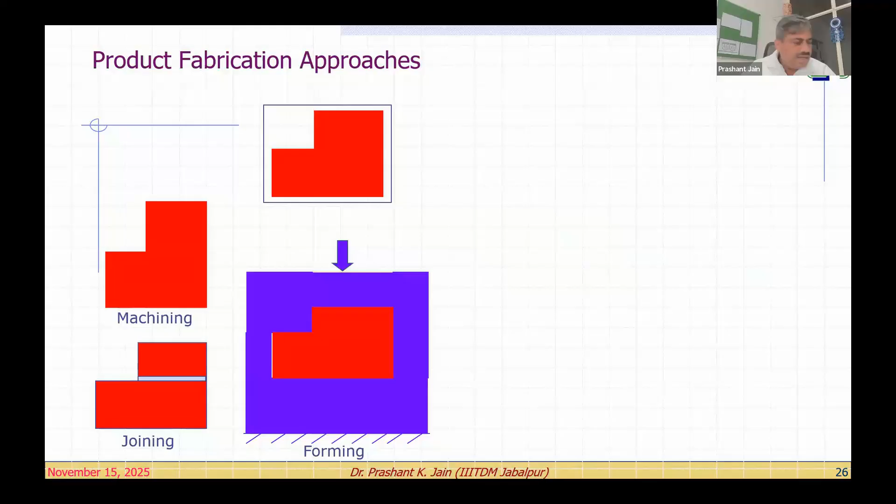Then we have the joining processes, right? So you know welding, soldering, etc. And the most common process is the forming process, maybe injection molding, die casting, or forgings. This is the most common. Now today we are talking about additive manufacturing, or rapid prototyping, or layered manufacturing, right? So you see, this time we have the bottom up approach. In this bottom up approach, we are depositing the material layer by layer and creating the layers towards the top. So like this.

Now you can see over here what advantage we can gain from this. So in additive manufacturing, what do you get? The process creates a model of an object directly from its CAD model by depositing the material in layers. So see, this is one panel of the hair dryer gun. Otherwise, if you don't go for rapid prototyping or 3D printing, a lot of things are required. For visualization, you may require many drawing sheets to convey your idea to the manufacturing shop. Then you have to create patterns, molds, etc., perform the casting, and then some finishing operations are required as well.

So in this case for polymer, you see here, the entire product can be made right in your hand. Okay, so this is the advantage you are going to get.

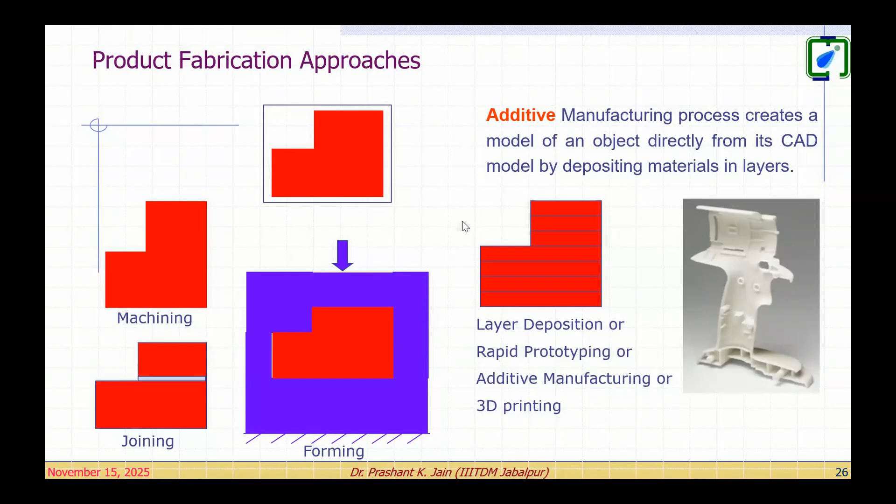So why do we go for additive manufacturing? Immediately when I say additive manufacturing, two things come to mind: additive, then why not subtractive? Or what is subtractive? So we have both ways available. Machining is a subtractive process. Begin with a solid piece of stock. The machinist carefully removes the undesired material, so you get the desired geometry. So subtractive means subtracting something.

Now, what happens in this case of subtractive machining? For some complex part geometry, it is very difficult to go for machining processes. It may be very exhaustive, very time consuming, and very, very expensive. Suppose you are working on brass, where mistakes are very costly. If your part is rejected or mismatched with the desired dimension, then you have to reject that piece, and the material cost is very high.

Sometimes the workpiece size is huge and the precise part to be fabricated might be very, very small. In that case, the machining process becomes very, very expensive. Even some of the parts you can see in the picture are very, very complex. You may not even be able to produce them using machining processes. In this case, look at this.

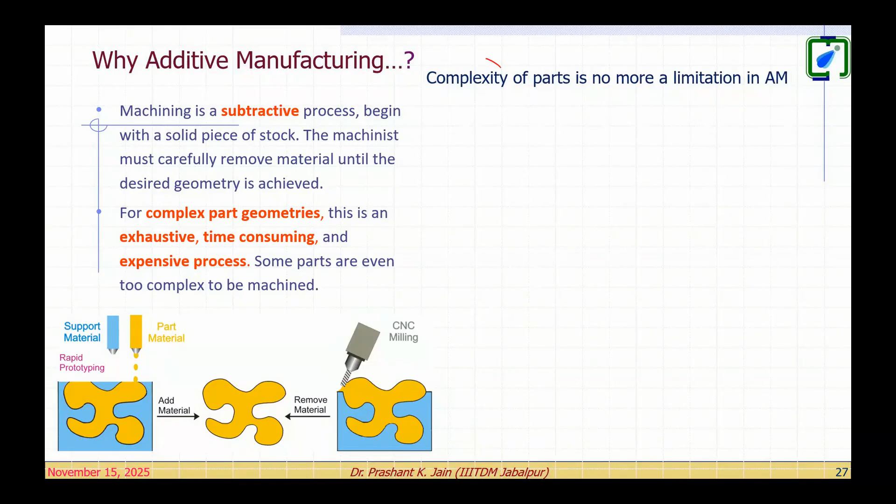So here you can see why we go for additive manufacturing: to avoid complex part geometries being very exhaustive, time consuming, or expensive. So what happens with additive manufacturing? The complexity of the part is no more a limitation.

What we often say, a picture is worth 1,000 words. It's a communication tool. You don't want to communicate something just by writing paragraphs. You want to draw something. Why? Because we want effective communication. Instead of text, you use the picture as a tool. With rapid prototyping of polymer material, you get the opportunity to print a model. So when we say a picture is worth 1,000 words, a model is worth 1,000 pictures. That's the advantage you get with additive manufacturing.

Now I'm going to very quickly tell you about the processes, fused deposition modeling. Why am I talking about fused deposition modeling? Because it has given the idea of how we can go for metal additive manufacturing, and why to go for metal additive manufacturing, which we have tried. In the subsequent part of this session, I will show you some more videos of our aluminum printing process.

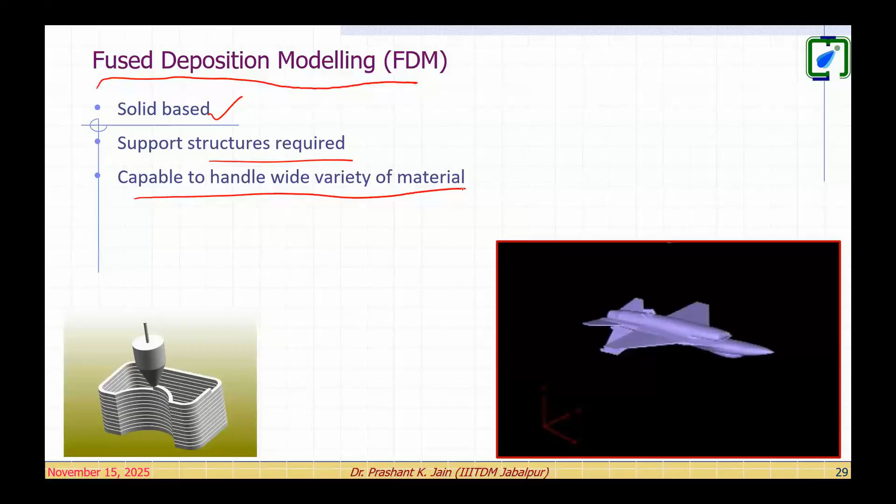This is commercially available, easily available. Polymer printing: the process is solid based, support structure is required in this case, and it is capable of handling a wide variety of materials. Look at this. This is the nozzle part and it forms like this, every successive layer. And how is the process working? Two wire spools are there, two heated nozzles are there. The red color is the heater, and here are the rollers. You can see over here, these two rollers.

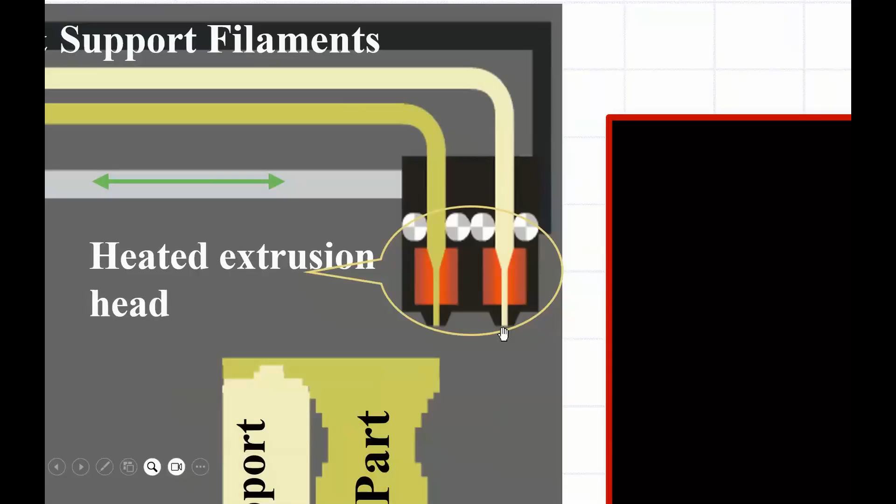Okay, so from here, this wire spool material is coming and pushed by these rollers through the nozzle, and here this is deposited, right? So this is the part material, this is the support material. Okay, and with this support material, this nozzle. So here is the build platform. Every time when this first layer is deposited, this platform will go down.

Okay. So here the part material, this part nozzle will work, and everywhere, just like a Mehendi cone, it will deposit the material. And for this overhanging feature, you require a support. This support material will be deposited in this way. Okay. So once this first layer is completed, this platform will go down by one layer. Say in this case, it is 150 micron. So by 150 micron, it will go down.

Okay. And you see, based on this kind of model, you see the architectural model. See the house model. This is through the ABS material and printed through the FDM process. Now, see the large model, your turbine model, the blades, etc., the full component you can see over here. This is built by the FDM machine.

Okay. So at this stage, I would like to know how many of you are aware about the FDM process. Accordingly, I will talk further. In the meantime, please type in the chat box. In the meantime, let me run this video.

You can see my screen, right? Can you listen to the sound? No, we cannot listen to that. Okay. I think the sound setting somewhere might be off. Aman, can you tell me? Yes, sir, I'm looking after it. Okay. Otherwise, I will explain. Nothing to worry. It's checking. No, it's video only. Okay, let us continue. System sound we wanted to transfer actually. We'll look for the system sound. Sir, it is from your end only. From my end, yeah, that is what I'm looking. If you have connected any earphone, maybe unplug it. No, not connected. I'm not using earphone. I'm directly using laptop. Okay, leave it. I will explain. Let us continue with this.

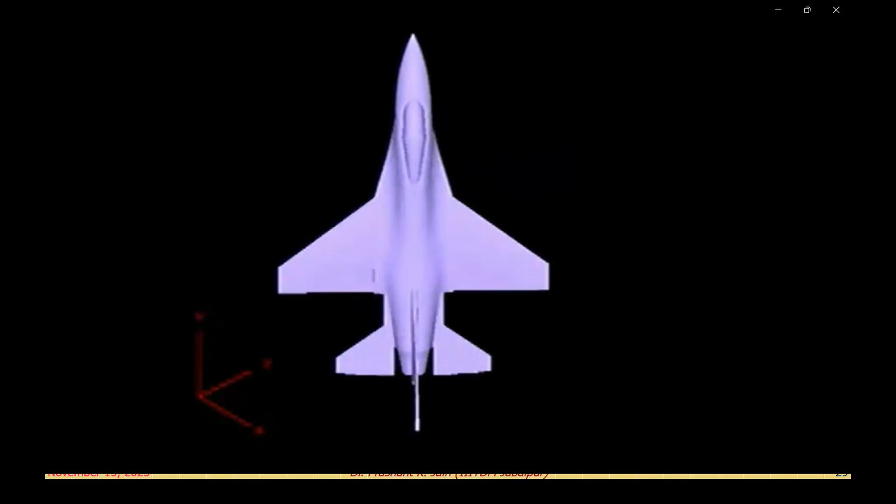So see what I'm trying to show here. You can see here, this is the solid model. And first we export it as an STL file. And with that STL file, that aeroplane model has been oriented and now it is sliced into planar sections. So every section is a planar section; contour information we have. Then this is the support information. Now see the top view of every contour.

You can see here how the nozzle is printing; in actual practice it is not that fast, right? But you see here, whatever geometric model you have created, that geometric model is now available and we can build it, we can print it, we can have it in our hand. Okay, that's the important thing. Now I'm coming back to my question.

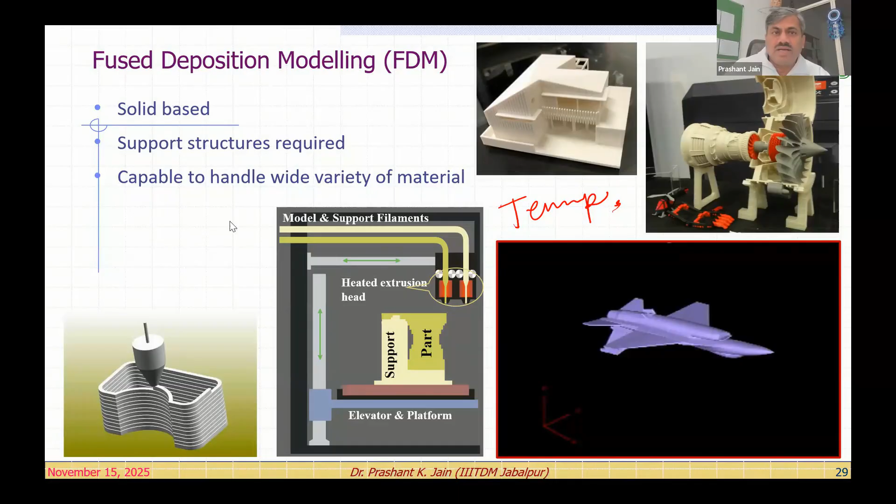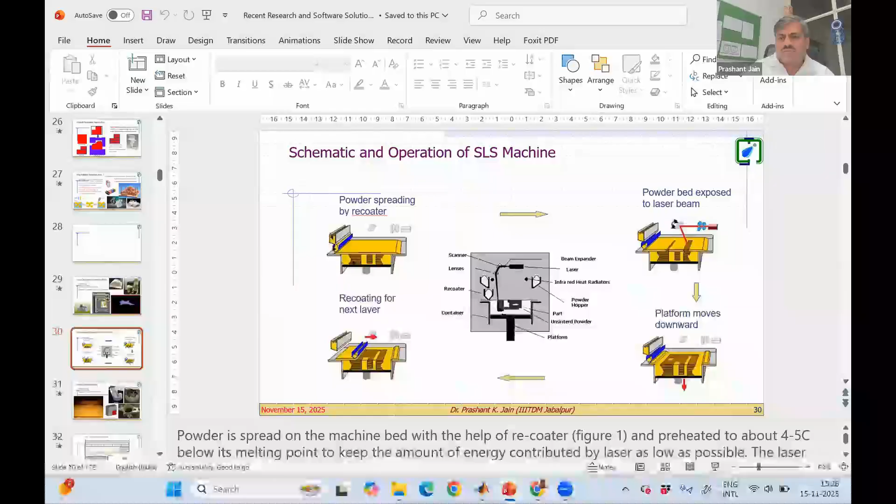Okay. Then what happens after the one area? You can see over here, this is the solid portion. Once this is solidified, this entire platform will go down. So you can see here, this is the solid material, and on either side you can see the unsolidified material, that is the powder. So in this case, you don't require any support material because the unsintered powder will also provide the support.

Okay, so once it is solidified, then it will be recoated again. So every time what happens? Recoating done, then the laser comes, scans the path, preheats the material, post-processes the material, and after this the platform will go down every time, and once it goes down, the recoater again comes left to right and right to left and lays the new fresh layer.

Can you think why I am talking about 150 micron layer thickness? And what would be the particle size in this case? Anyone? What would be the particle size in this case? 150 microns. Pardon? 150 microns. 150 micron. Okay. Anybody else?

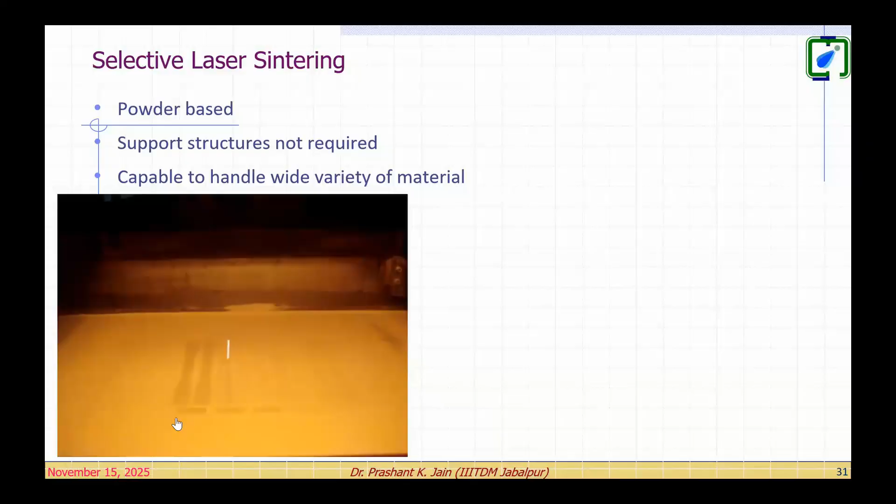Look at this video. We are printing some tensile specimens. You can see these tensile specimens with a different, darker color. That means in this area the material is solidified, the material is joined together, right? And this is the powder bed platform. The laser light has become reflective because, for experimental purposes, we have mixed nano clay with this polyamide 2200. This is the nylon material; the commercial name is polyamide 2200. So 40 to 60 micron size of the polyamide material.

Okay, let me continue this video. See here. This is the recoater. This recoater has spread the new layer. The first layer after solidification goes down and the new layer has been built up. And this light sparking, the immediate light you have seen, is the infrared heater. That infrared heater will keep the new layer heated just 4-5 degrees centigrade below the temperature.

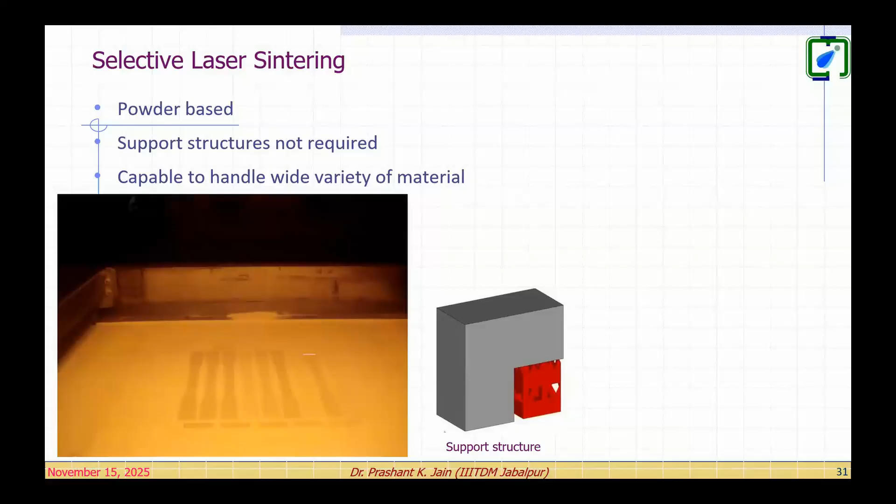Otherwise, if you don't have additive manufacturing, how are you going to make this part? How many small parts do you have to take for the build, or for casting, or how after sintering are you going to remove this part? Every time you require investment casting because you may not be able to reuse it. Similarly, see how many parting lines there are, how many different surfaces and angles. Because of these multi-directional features, you cannot do CNC machining. And since you can't do CNC machining for this part, you can go for 3D printing. And in 3D printing as well, you have to properly design and understand.

Okay, so that's how the metal is deposited. Here we take 40 to 60 micron powder. In the case of metal, we have to take 20 micron size particles. Now this belongs to steel, 316L steel. So that steel has to be in powder form first. That is the big cost and challenge, right?

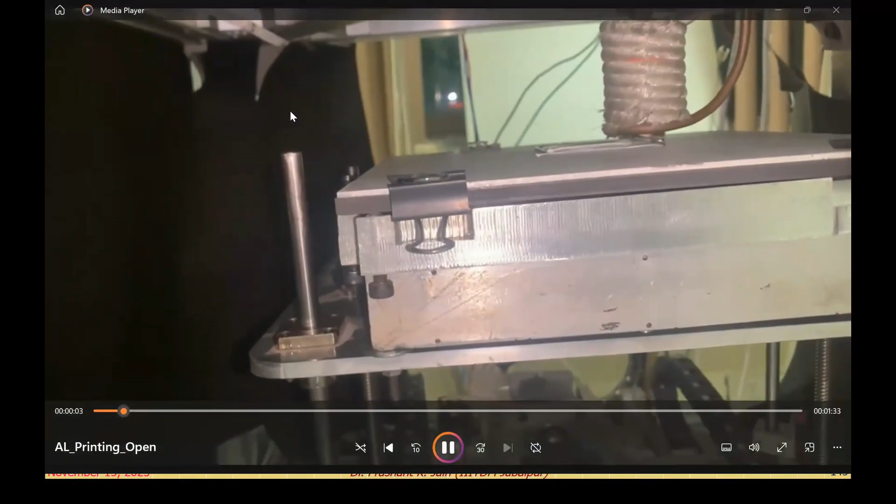See, this is our build experimental setup. With the polymer machine you have seen how it is depositing the material. Now see what is happening with the metal. This is our experimental setup which we have developed in the lab. See here, the extruder head is there, the nozzle is there. Instead of a resistance heater, we have an induction heater; these are the copper coils. Inside this, the nozzle is moving and depositing the aluminum just like the plastic. The plastic was printed around 220 degrees centigrade; this aluminum is printing around 600 degrees centigrade. And it is a highly reactive material.

Okay, so immediately, as soon as it comes out, it reacts with oxygen. So oxidation occurs and that will not allow you to join the material. That's why it has become more challenging.

You can see here on the bottom side, this is the ball screw, right? Chain conveyor system. This ball screw is rotating this table. So the positioning is done in XY, and for the Z direction, the table comes down one step every time.

Okay, I hope this will create a clear picture in your mind of what we are going to achieve. So let me start from the beginning. This is the scene with metal additive manufacturing. Okay, so now I'm coming back to the principle of additive manufacturing after talking about two processes.

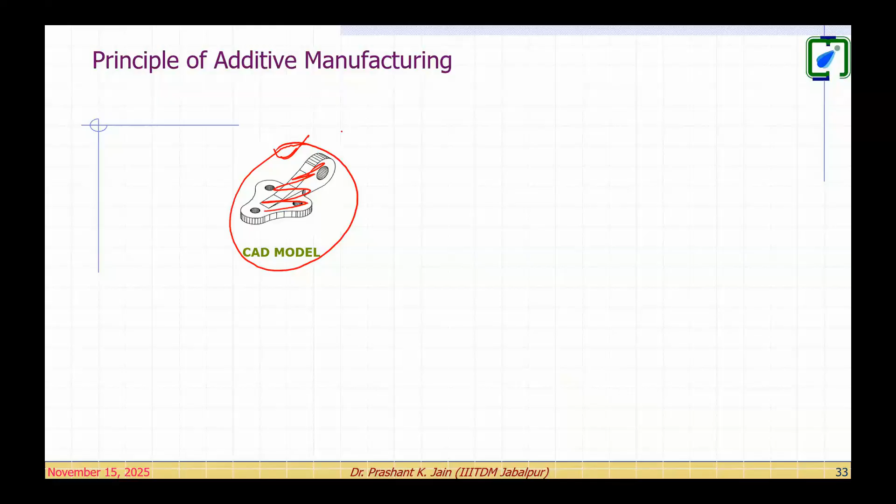Okay, this is the CAD model you are going to make. After designing, you want to make a print from any machine, maybe a metal machine or a polymer machine, maybe extrusion based or powder based, whatever. This information is stored in the computer in the form of a picture or a geometric model. With this geometric model, you need to find out this information because every time you are going to build a layer.

Yes or no? Yes, sir.

So once we get this information in the layer, then we will square it to make it the prismatic size of each and every layer, because a layer cannot be built in this way. This is something like building your house. Suppose you take these two layers, your layer should be like this. So everything is now made in the form of stairs, so that every time you can deposit the material in this area. The moment you deposit material, this area will be filled. Similarly here, your nozzle will come and deposit this area.

Okay, so we say CAD model, slicing the CAD model, squaring the edges of the model. Once the squaring of edges has been done, then you will deposit the material or cut the material in this shape. Then you start joining them, so stacking and pasting of the layers. Once we join them, what are we going to receive? We will receive this product.

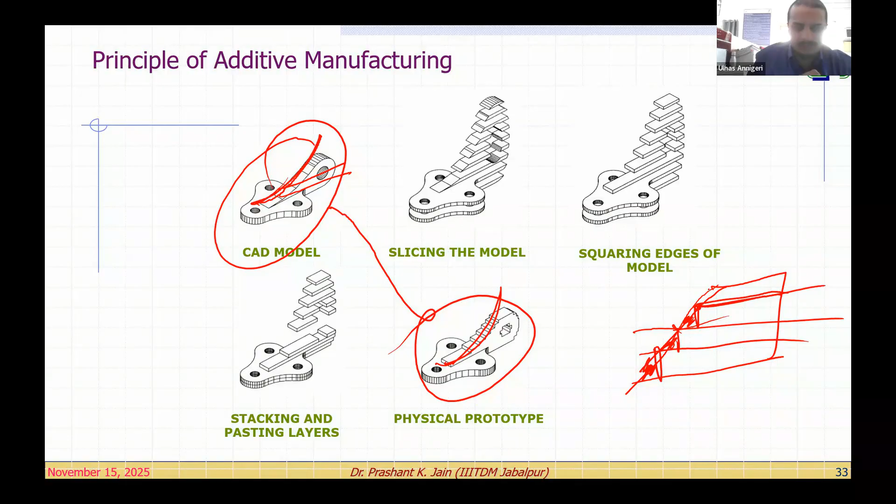At least five yes responses. Let me go back to the chat box. Yes, Manish, Ulhas, Anand. 3 responses, 4 responses, Vivek Gangrade. Yes.

One more response. This is what we call the stair-stepping effect. What is going to happen? Everything will have the stair-stepping effect. Okay.

Now look at that. Let me come to the process chain. What is required for this information? You want a cross section to get this contour information. Only once you get this contour information can you do the square edging. And once you know this contour, you can formulate the nozzle path. So our requirement is first to find out the contour information. This is the model, and you are cross sectioning it one by one. Got it?

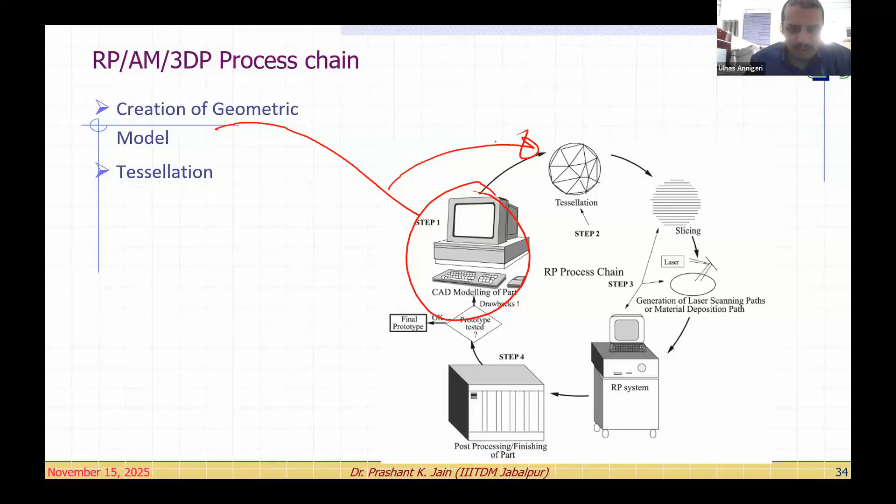So coming to the process chain: your computer model, you are creating a geometry, tessellating it. Does anybody know about tessellation? What is tessellation? STL format. Triangulation, sir. Okay, STL format. After tessellation, the file is saved as an STL file. But what is tessellation, or what do we do when we save any component in an STL file? Triangulation. More triangulation, more file size. Less triangulation, coarser and the minimum file size. Okay. Anyone else?

Anyone else? Tessellation is a piecewise approximation of the surface. You had this ball surface, and you approximated it piecewise with triangles.

This can be a triangle, a rectangle, pentagon, hexagon, anything. But we opt for the triangle because it is the plane which can be created with the minimum number of sides; 3 sides are the minimum required to create a plane. Another thing, with a 3-sided plane, a smaller-sided plane, you can maximize the area covered under this tessellation. For example, suppose it is a sphere like this, and you divide it into only 4 triangles. This much material will be removed.

Got it? But instead, if you have 8 lines, we can have this kind of shape. Instead of this 1 line, you can convert it to 2 lines, and only this much volume will be removed. So you have saved more volume, so you will be closer to the desired design of the designer. That's why we opt for the triangle. Is that clear? And that's why we call it triangulation.

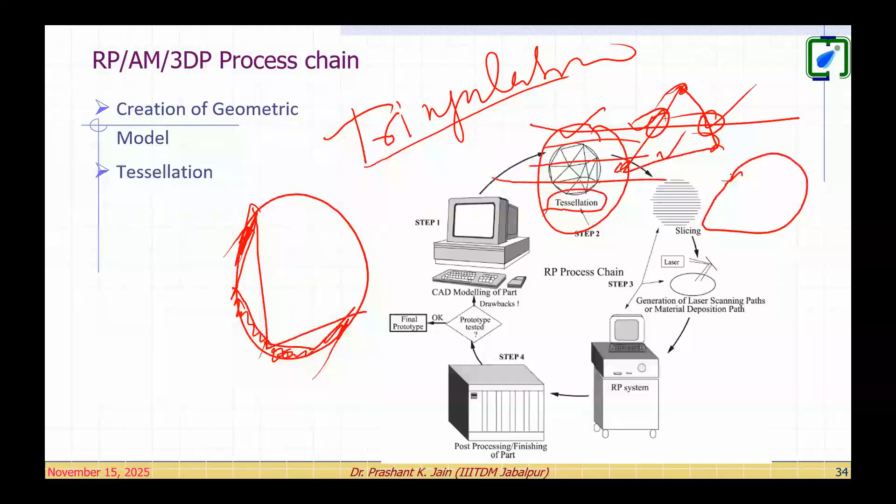And further, this plane can be taken into 3 lines. So suppose this is the plane passing through this triangle. You can find out this intersection point, this intersection point. And similarly, you can take all multiple triangles and find out whatever the number of points coming, maybe sometime 1, 2, or maybe sometime 3, hypothetically. So that will help you to make this contour information. Okay.

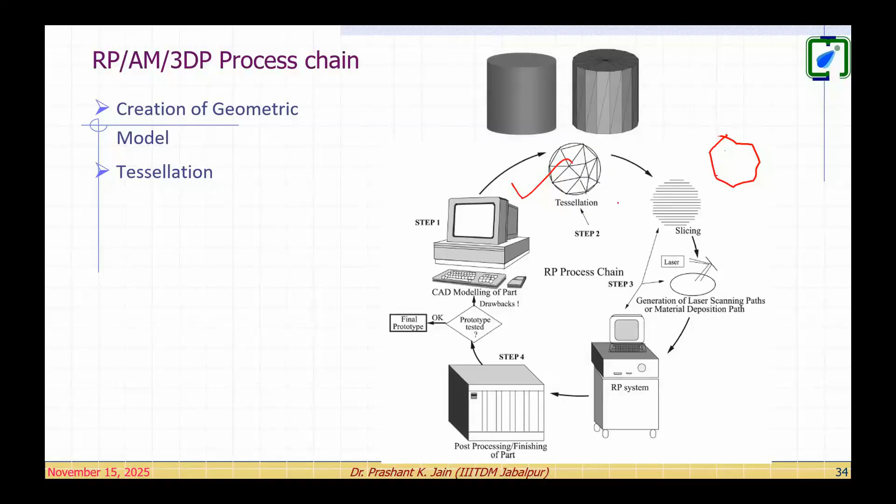Now this is what somebody was telling here. If you have the more number of triangles, this contour will be more and more smooth, more and more close to the desired geometry. Okay, so that is one, the tessellation you have done. Third, you have done the slicing. After that slicing, you got this contour, right?

Now you are going to generate either a nozzle path, and if it is a laser, then the galvano scanner will generate the path, right? So slicing done, then generating the laser path, scanning path. I will show you in the MATLAB how to do it. Then the post-processing. Post-processing will remove the support structure, any other unwanted material, or suppose some support structure is there.

So see how we are going to implement it. The first model you can see, this is the Pro-E model. This is the tessellated model. Can you see here the different triangles are there? What we have talked, on the top surface only 2 triangles are sufficient. But here you can see sculptured surfaces, curved surfaces. So more number of triangles are there to keep very close to the desired surface. And on this side, you can see here.

Okay, look at this. After this, what will we do? See, what is this diagram showing? Blue color lines are there. We have connected all the intersection points to each other. Okay, but this information is not at all useful for us. Right. So what do we have to do? We have to join these points in some logical sequence, right?

So you can see here in these points, this blue color contour is showing the external contour. This red color contour is showing the internal contour, like this. See here, we cross-section at this point. Once we cross-section, you can see this area. Inside, hollow material is there, and this is the solid part. Similarly, here is the solid part. So that is how we find out the internal and external contour.

Then the one task remaining is getting the tool path generated. For tool path generation, we can apply some logic. Suppose my laser is moving like this. At the first intersection, I can say the laser is switched on. So the laser will be switched on and this area will be solidified. At the second intersection, we can say the laser has to be switched off. So the laser is off up to this point. So no solidification takes place, and you don't require solidification in this area.

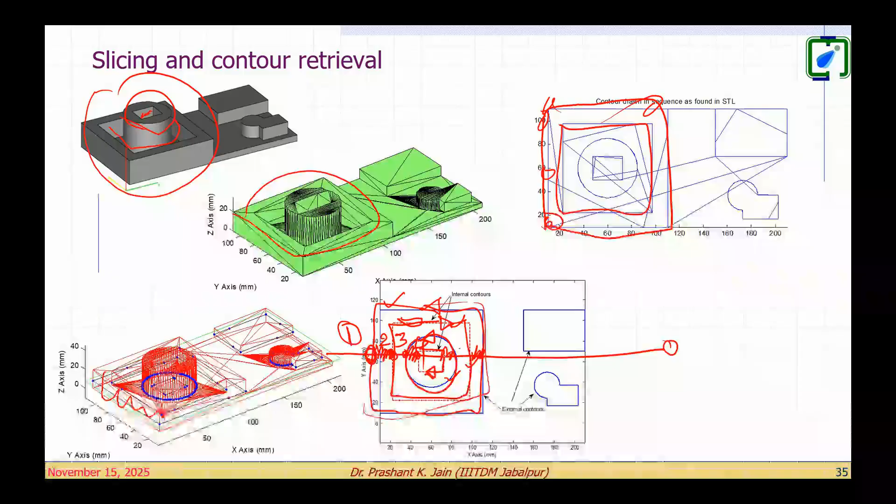I hope in further sections, Dr. Sachin will take you more on sensors and actuators and CNC machines, IoT kind of thing. So you can see the programming you have to do, and that programming you have to connect with the hardware. Okay. So this one. Now see how this is generated and taken into this.

See the next slide. You see over here the same way. Here your switch on, switch off. So this area you have already marked, which is going to be solidified, right? Solidification. Remaining area laser will fall down. No solidification means it will be switched off. Is that clear now? The last figure is clear now? Yes, sir.

Okay. So see here, otherwise we have the commercial softwares. We can do all this slicing. Let me show you. How many of you are aware about the Magics software? Quickly, you can type in the chat box or say yes, no. Anyone? So that I will go to Magics, or we can skip also.

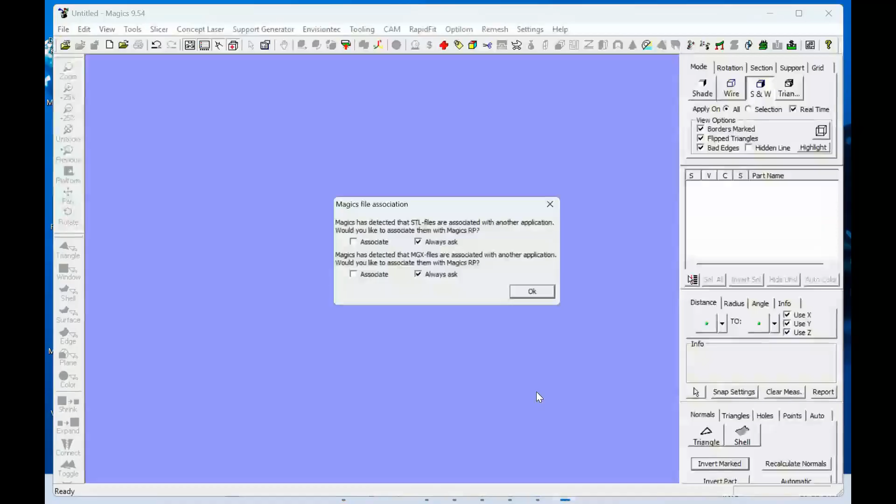Okay. I'm not going into the detail of the software, but I will let you know what we have done through MATLAB. So I will run MATLAB as well as SolidWorks, both. Sorry, and Magics as well. Because we are running short of time, I will let you know how we have done this. And if time permits, in some other session we will discuss more detail on the ball screws, actuators, sensors, so that how we control our CNC machine.

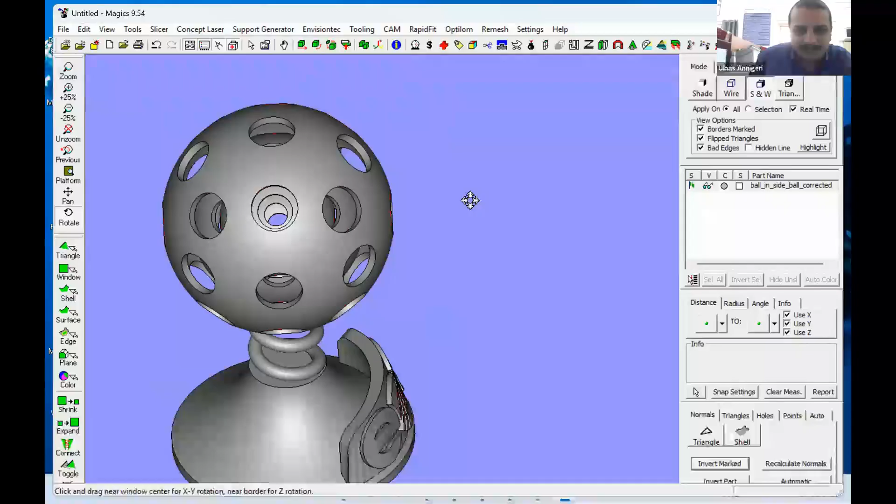Let me load a part over here. You can see over here, right? I'm using this part. You can see here, there are 3 spheres inside each one. Is it visible, right? Yes, sir, it is visible. Okay, right now I will tell you, suppose this is what we do. This is the shaded mode you are seeing. This is the wireframe, and this is the solid model.

Now you see the triangles. What is there? This is the STL file, and everything is kept in triangles. You can see on my screen that all the surfaces are designed as triangles, everywhere there is surface. And why do we do this triangulation? Because we wanted to facilitate the slicing process. So that's why we do the tessellation or triangulation.

Okay, now let me show you the section. Can you see now the part is sectioned, cross section? Can you see the red color is the inside picture showing, and the blue color contour is visible. You can see over here the visible contour. Okay, keep on typing yes, no, so that I can quickly get the response, and that will motivate me to move further.

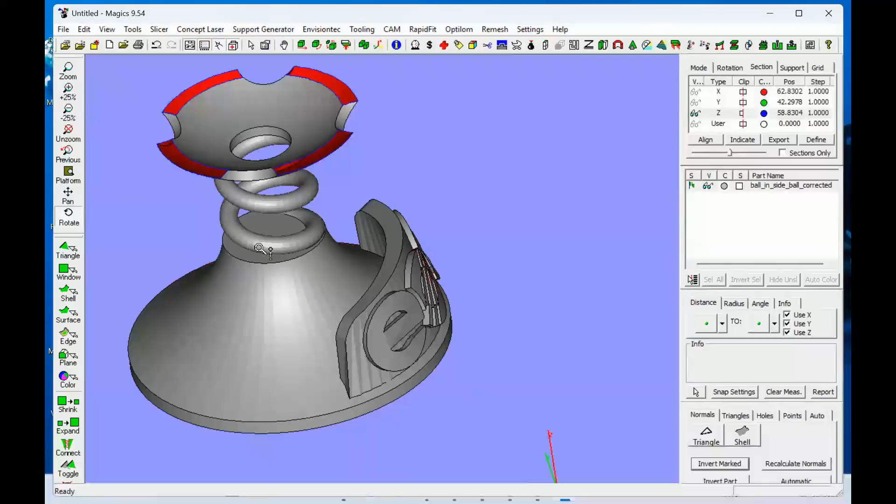Yeah, very nice. So you see here, the moment I start moving in the vertical direction, see what is going to happen in the first slice. See, you see the circle moving on the top side. You can see here, as somebody said, that is the contour at a specific slice. You see here the contour at a specific slice. At this stage, you see only the sphere is going to build in this way. Right?

See here, the first sphere is built, second sphere, third sphere, right? And from all the triangles, they are connected and converted into a logical sequence. So we have the closed contour. The requirement is that the contour is a closed contour. Open contour we cannot accept. Okay. And you see here, the 3 spheres are built without touching each other, without joining each other.

So now you know about the SLS process. So what is actually happening? In the SLS process, in between the first contour and the second contour, unsintered powder will provide the support. You can see on the screen, third contour, second contour, you see it is in the air. It is not connecting with anywhere. Okay, but it will still be built without any joint, and it will continue to build like this.

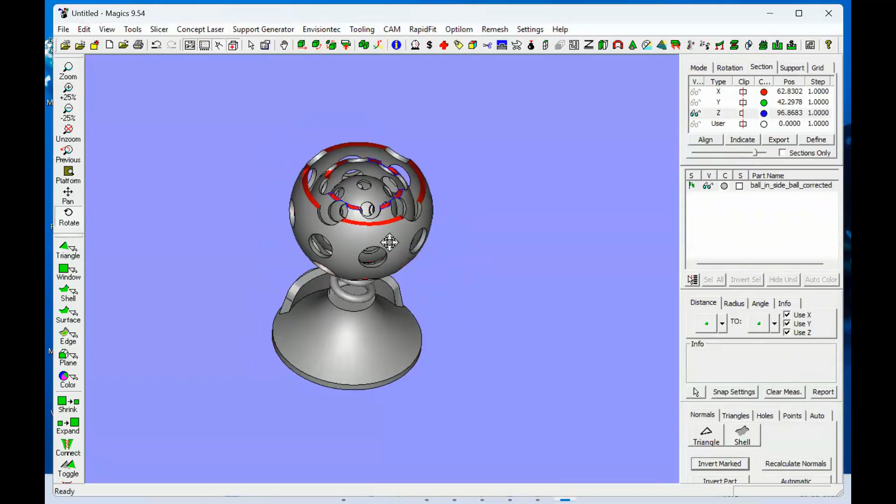See, the first sphere is completed, right? You can see over here. I'm trying to slowly move. I hope you can see the movement of the sphere. Okay, then we continue. So what will happen? Second sphere built now, third, second, and finally like this, and your part will be built, right? And this is the section. This is what we have done in the Magics. Okay.

So at this stage, if you have any other query, then we will switch back to the presentation mode. There is no support material in case of SLS. The powder that is supporting actually, could it be used or is it waste? Very nice. This can be reused, but we need to mix with some fresh powder as well. Whatever material you have used, you can reuse it, but with some percentage of the fresh material. That technically we call the refresh rate.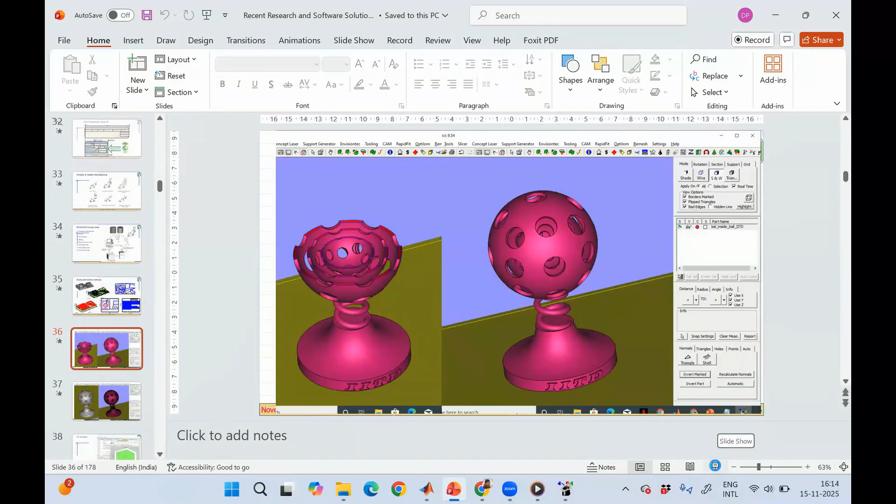So some 60-40 or 70-30 ratio, we have to take so that we can reuse. Because otherwise, its neck formation capability goes down. So two particles are there, but they will not form the neck. They will not join. So to make the joining capability of the powder remain intact, we have to put some fresh powder also, right? That's the requirement. Remaining things can work.

Okay, now look at this. This is the STL file. I will show you this in MATLAB. This is the background. You can see here the program written in MATLAB so that this STL file can be read. And this is how, if you open an STL file...

Because of the shortage of time, I think we have to wind up by 4:30, 4:40. Your next session is at 5 p.m., right? So you can have a 10-15 minute break.

So I'm not opening the text file, but you can see on my screen, right, how the STL file looks if you open it in the notepad. See here? Let me see. If I hyperlinked it, I will open. Yeah. This is the cube file. Okay, I'm opening it in the notepad. You can see here, this is the solid cube.

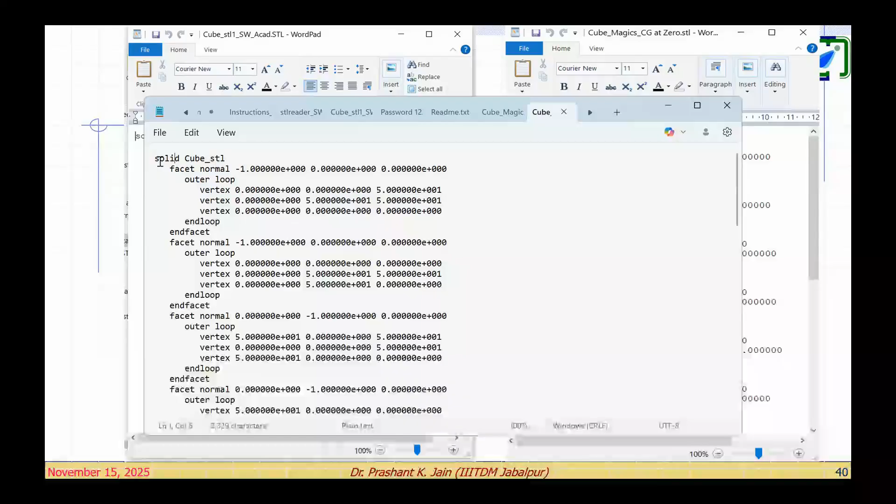What does this contain? The facet normal and the vertices. So Cx, Cy, Cz and outer loop x1, y1, z1, x2, y2, z2, x3, y3, z3, means three vertices and the facet normal. Okay. Somebody I think is saying the same. Yes, sir. Right. So in this file, you see there is a difference in the syntax. This file we have exported from SolidWorks. At the same time, this file we have exported from Magics. So here scientific units are there. Here decimal units are there.

Look at this: solid facet normal 1, 0, 0, 5, 5, 5, minus 5, because we have taken the 10 millimeter cube which is centered at the origin. So that's why all the sides are becoming 5, 5. You can see on this screen. This is the 5, 5 and this side 10, 10, because this time I have taken the cube corner at 0. So the dimension will become 0, 10 or minus 10. And here the 5, 5, 5. Okay, so that's the way. This is how you can open the STL.

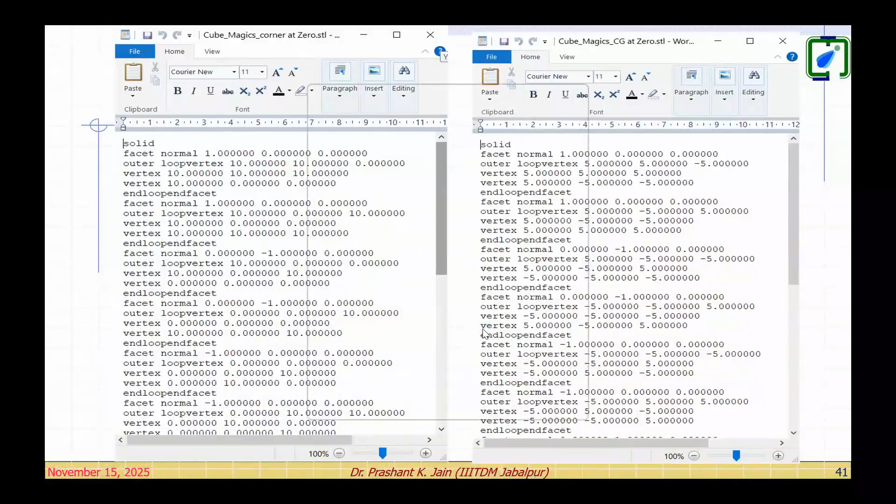Now, I hope you can understand that for an STL file, you may not require SolidWorks or CATIA, Pro-E or Fusion 360. If you are good in designing, you can type it in MS Word, save it with the .STL extension and you can use it. Or you can edit it in this notepad and change the dimension. So your geometric model will change.

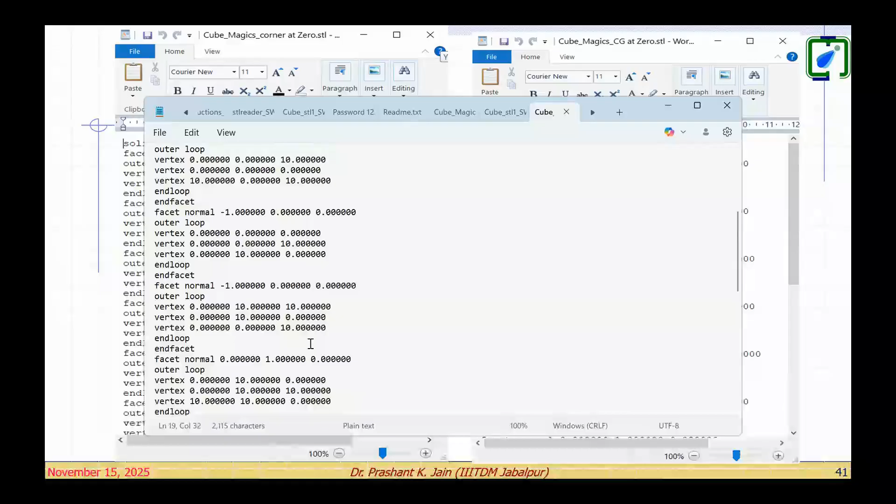Okay, look at this. The same model is there. Can anybody guess? This is representing the cube. Can anybody say how many paragraphs like this would be there in this file? One paragraph is representing one facet. And the cube will have how many facets?

Depending on whatever layer thickness you have chosen and what is the height of the... No, not layer. Let me correct. The facet has nothing to do with the layer. Right? Okay. This is the solid model which you have converted into the STL file. So everywhere you have here the facets. These are the facets. So this is one facet on the top. Okay. Got it?

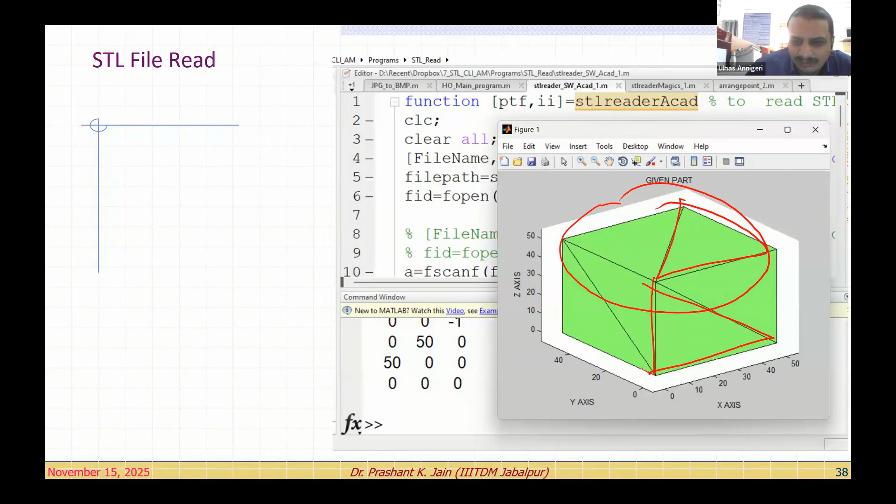Now the layer will come, this is one facet, right? So what happens? This is actually one square shape, but converted into two facets, because we have done the tessellation. So this volume has to be closed, and both are making it a solid model closed volume. One square facet is converted into two triangular faces.

Okay. Now you go for the intersection. So you will receive this point, this point, this point, and this point. Then you are going to join them like this. But remember, these points are not in a sequence in the STL file. This triangle can be 1, this can be 2, this can be 3, backside may be 4, this can be 7. Then you need to identify which point has to be connected with which point. Got it?

Clear? So how many? 1, 2, 3, 4. How many would there be in this cube? How many facets would be there? 12. 16, sir. Anybody else? 12, sir. 12 facets would be there. Very nice, right? Then we start.

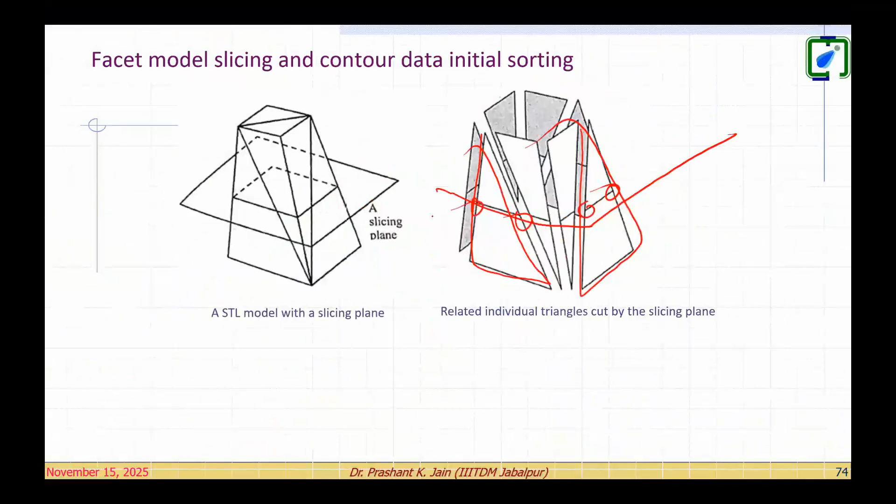So got it? This is the way we have done the tessellation, and that tessellation will facilitate us to get the contour information from this STL. Another example. You have an exploded view, so all these triangles are separated, right? Then the intersection. So you got this point. Individual triangles. So this contour information you are going to receive.

Now I am not going into much detail, but you can see with this contour information you will receive this contour at that particular height. Since it's a cube, everywhere you are going to get the square, but the position of these points will keep changing. Corner points will remain the same, but the mid points' position will be changing because they are on this diagonal line. So here, here, it will move on. Clear? So this is how we proceed with the tessellation and the contour generation.

Then we have to generate them in a logical sequence. You can see over here we receive this point, X, Y. Forget about the Z, because Z is showing the height. So X, Y, head and tail: 0, 25, 0, 0. Start point is this, end point is this. Then start point is 50, 50, end point is this. So what we require is to connect them in a logical sequence.

Suppose this line is there, 1, 2. This is another line, say 7, 8. This is another line, say 5, 6. So you will see where this 2 is ending and where 2 is starting. There may be another line starting 2 going to 3. So you can connect this 2 with 2, this 3 with 3, then 6 to 7 like this. So this has to be connected in a logical sequence.

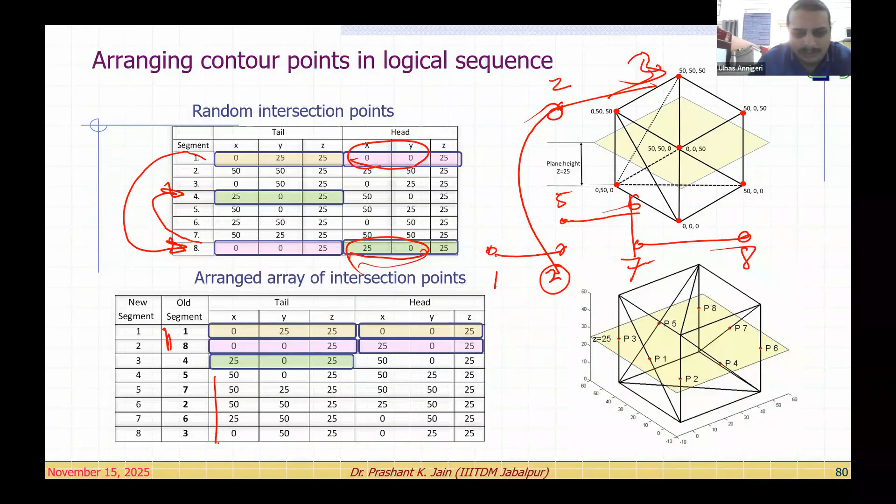Now look at this one example of the pyramid P1, P2, P3 and P1, P2, P3, P4, how we generate the contour information. Based on this contour information, our next task is, suppose you got this contour information. This is the contour information you got. Now within this contour, this is the nozzle path you have to generate.

So for this generation of nozzle path, you can draw a straight line, find out this intersection, offset it by whatever the dimension, say 5 millimeter you want to move upward. So the second point, then you draw again a parallel line, find out the intersection point, then again 5 millimeter, then again intersection point, right? And the same thing you can do with programming with MATLAB or Python or whatever way you would like.

So the entire thing can be done with MATLAB, and how to write that information. What actually is it? A point means XY, right? What does the 3D printing machine require? G code. X, Y and Z coordinates. So now you got the XYZ of a contour at a particular height, right? With this information you can write it over here, and this program you can send to your 3D printing machine.

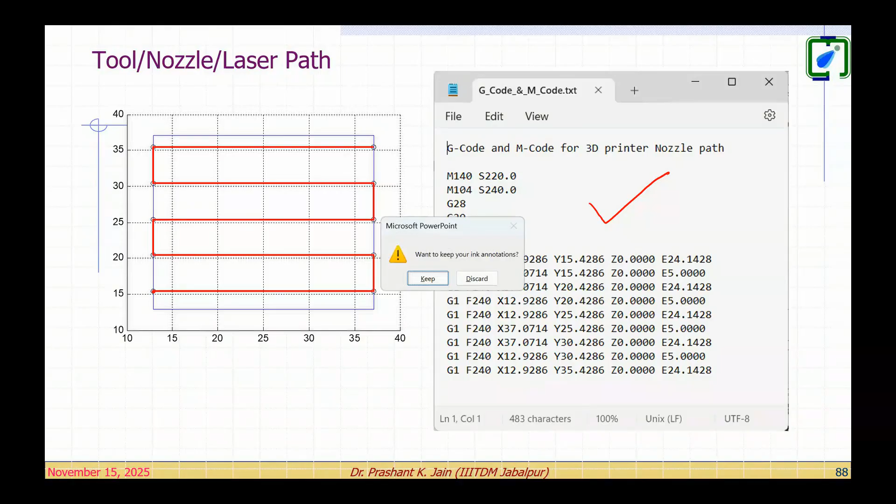You don't require any open source software, any commercial software or anything. You can do the entire thing with your MATLAB. This is what I showed you in the case of the computational part. Let me take you to MATLAB. I had kept MATLAB open. Where is this? Yes.

Okay, I am taking only one STL file running. Let me open an STL file. Since we are talking about a cube, let us take a cube. Cube SolidWorks. Which file have I taken? Yes. You can see here, this is the cube file I have shown you. Now you can see on my screen, this is MATLAB.

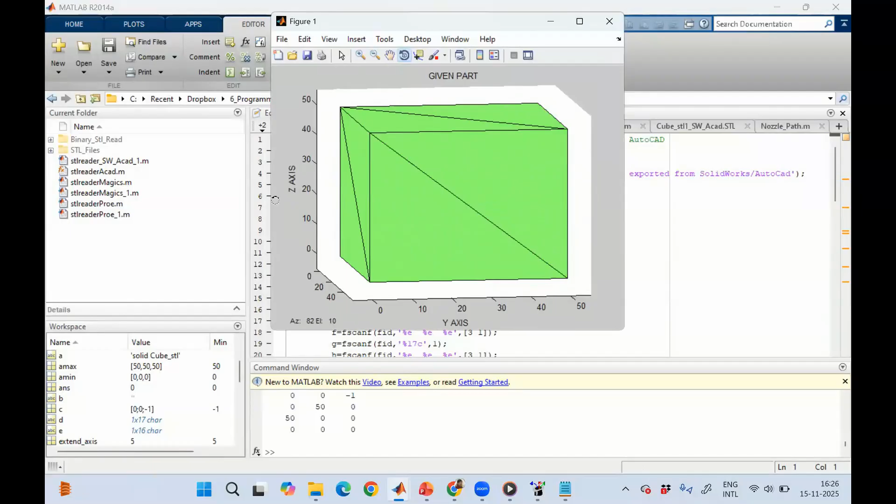First face, surface normal, coordinates, 3 coordinates. So this is the first face. Second face, third face, 4th, 5th, 6th, 7th, 8th, 9th, and up to 12 faces, right? So this is the information we have collected. Now we went into some other mathematical programming and algorithm to have its cross section.

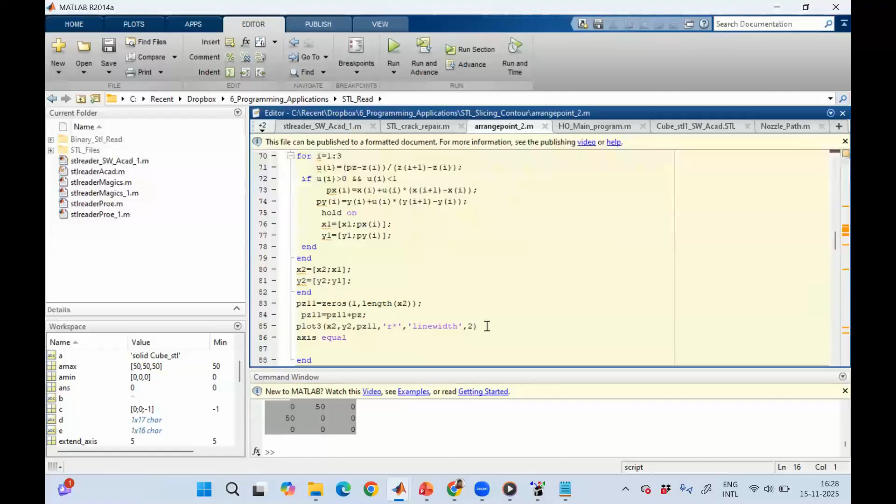Okay, let me show you crack repair. Let me have this file. So this is a big, large program where we open an STL file, cross section it, and arrange them in a logical sequence. Since we talked about the cube, let me open the cube file only. And this data we will send to the data file. Let me take an STL file. Let us take a cube file.

So this is the cube file, and you can see over here, for the geometry, my program already knows the starting point is 0 and the maximum height is 50. Let it generate the data. So let me cross section at 25. Let me press enter, and this is the MATLAB output you got.

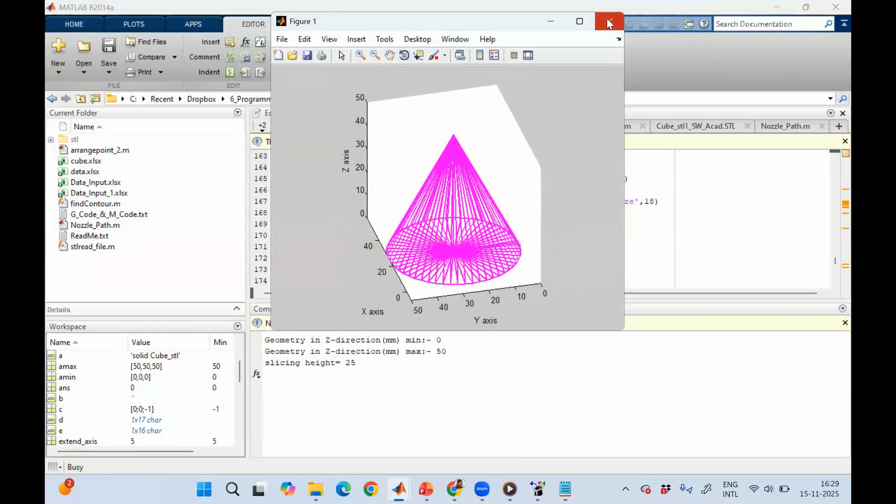Oh, sorry. What have we taken? Oh, sorry. We have taken the cone. We will regenerate. We will take the cube again. Here there are so many points, so understanding may be difficult, but we will take the cube as well. Okay, so this is the contour information we got. Let me close all. Because so many hundreds of points are there, that's why it is taking time.

And you see these many matrices generated for the cube at 25 height, right? And then all the points are logically connected. You see here around 55, 56 points are generated. Okay, let me run the same program again for the cube.

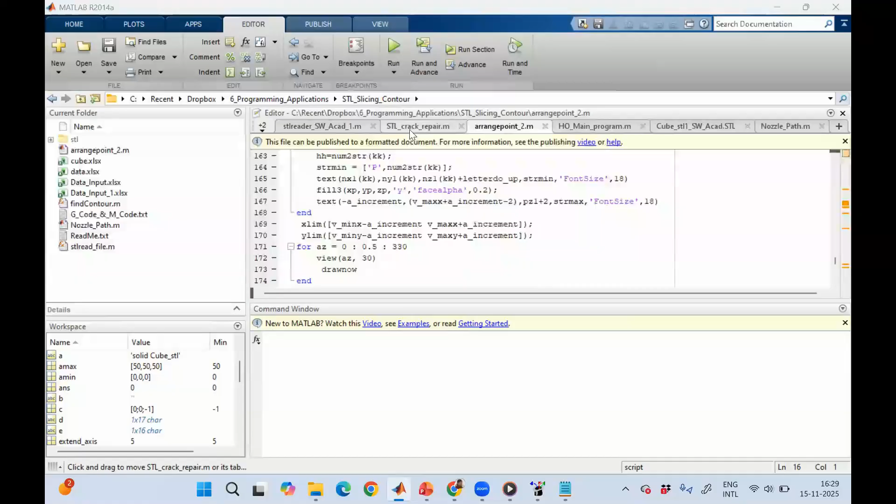Okay. So 0 to 50, let me take again 25. See, this is the STL file, right? This is the contour. You can see head and tail both.

Now you see on the bottom side, you got the head and tail, new segment, old segment. You remember this? We have seen this in 25, we have arranged, okay? 50, 25, 50, 50 like this. Clear? That's the same thing I have shown you in the presentation. Right now you can look at it here, the same thing we can have.

Let me put the close all. Okay, and this information is sent to this file, data. Whatever the points you have generated, they are stored over here, right?

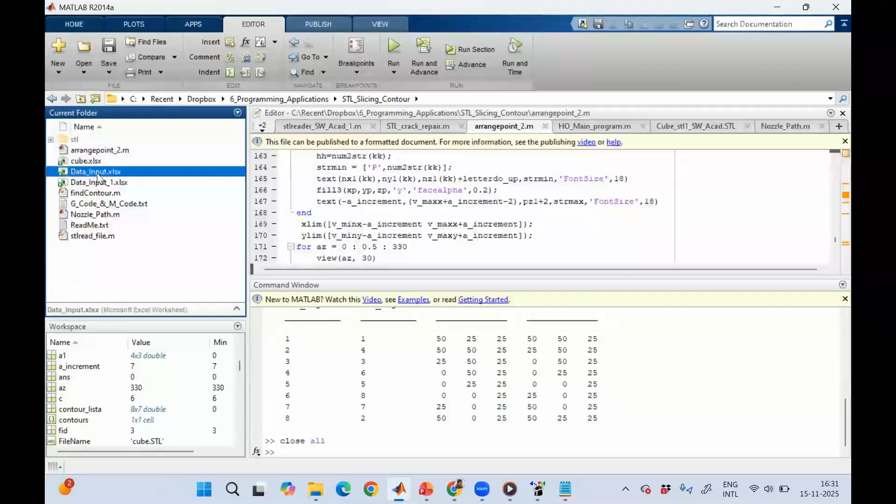Let me delete this file. Okay, we have deleted this data XLS file and will regenerate and open the same file for cube. Okay, and this time let me put a height 30. Okay, see the STL file.

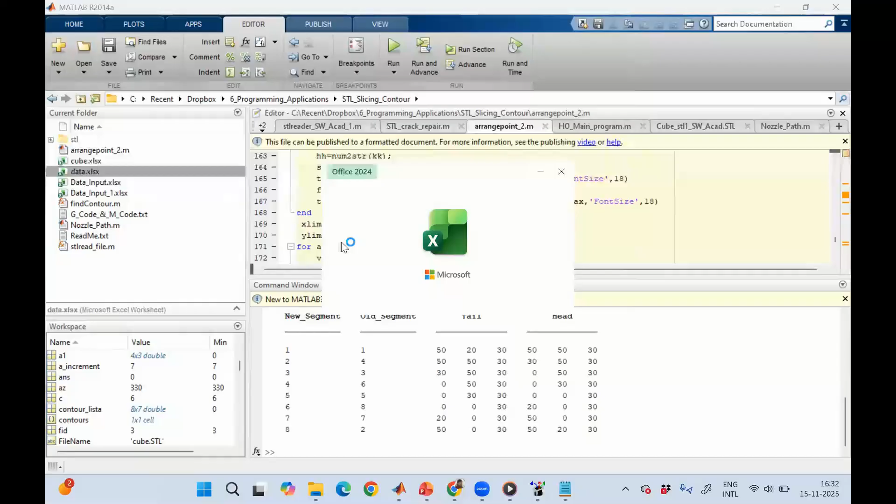See here, this is the contour generated, right? Now look at this, the data file. Okay, it is generating the data file. Okay, now the data file is regenerated. Open outside the MATLAB. You can see over here. This is the information, contour points generated, the 8 points by the program, right? This program, we can directly take it to the lab.

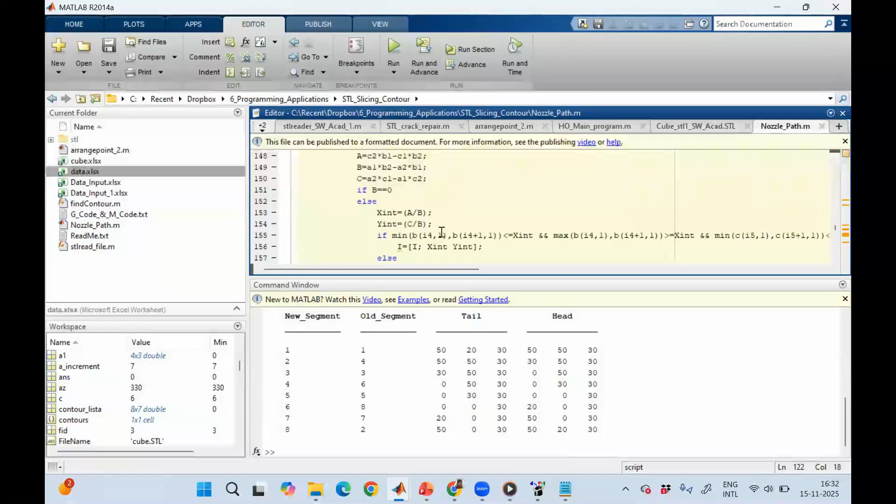So you can see, let me run this nozzle path program. Right, this nozzle path will go to this data file, read those 8 points, and then generate the nozzle path. It will ask some information from the user and then generate the nozzle path. Okay, so this nozzle path is generated and it will be written in this G&M code file, right? And on the bottom side you can see this file, G&M code nozzle path. Okay, this is the file.

So let me delete this first so that we can generate the fresh file. I have deleted this file. You can see here, the file is deleted. Now we will run this nozzle path. So it is asking for input size. You can see this is the contour you have generated, right? 0 to 50. Okay. So let me say I have taken 4, the step size.

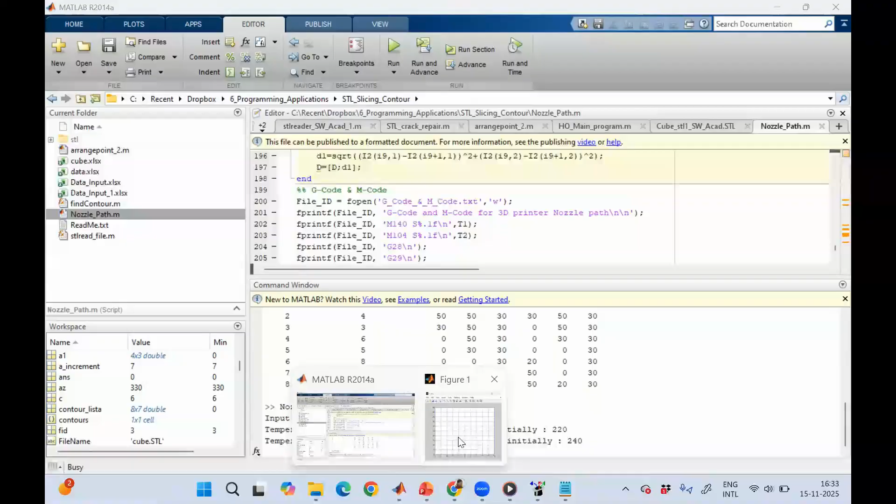Temperature at which bed has to be heated initially, let's say 220. Temperature at which nozzle needs to be heated initially, say 240. And you see here, this will be generating the nozzle path. Got it? This is the nozzle path generated, and that G&M code is again generated. You can see over here, this is the G&M code file.

Let me open this outside the MATLAB. See, this is the part program, it has been generated. This program you can directly copy to your 3D printer, and the nozzle path will be generated. Got it? Is that okay? Okay. So this is all about how you are going to generate the data.

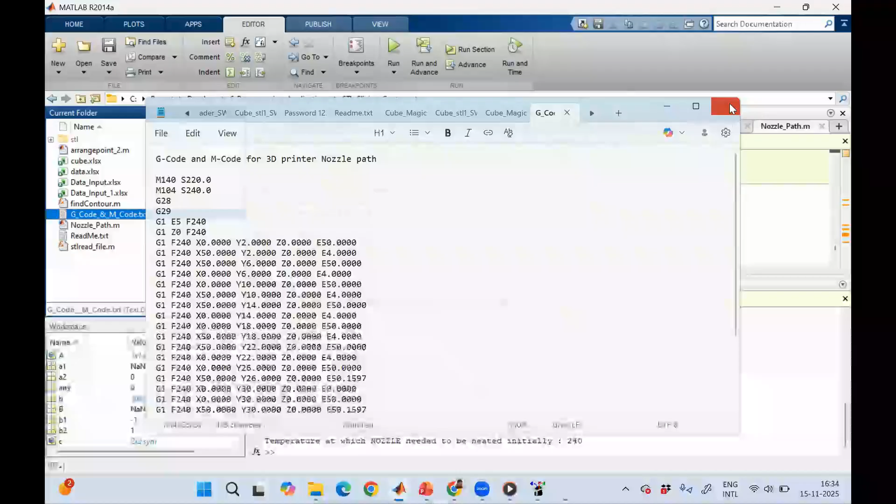Okay, then what happens? Initially, we have taken this to the conversion of our CNC machines, right? And we have developed the hybrid additive subtractive manufacturing system. So what we did in this setup, we have developed an extruder head. Okay, in this extruder head, see this extruder head.

Here is the resistance heater, just like your polymer printing. And here is the milling machine head. And on this milling machine head, we have put this hopper. So instead of wired spool material, the small pellets of the material can be used here. So no need to have the material in the form of a wired spool. And this will be heated, extruded, and run on the CNC machine bed.

Okay. Let me run this video. You can see here how we have deposited the material on the CNC machine.

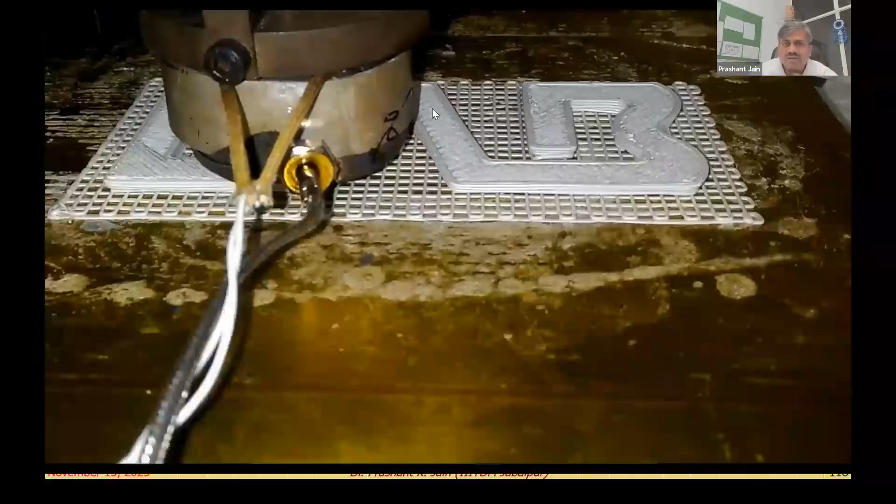You can see over here, after a lot of experimentation, we have developed it so that it can smoothly print the part. Right? So that is the part you have seen, which we have done on this. On the same setup, we have changed this extruder head. There is an automatic tool changer. We can exchange this extruder head and we can put the material removal tool on the same setup without removing this material. That's why we call it hybrid additive subtractive. Okay, let's see this video as well.

So you see how we are removing the extra material which is deposited on the same setup, right? I would need a response over here. Have you seen both the videos? Removal and joining, additive and subtractive both.

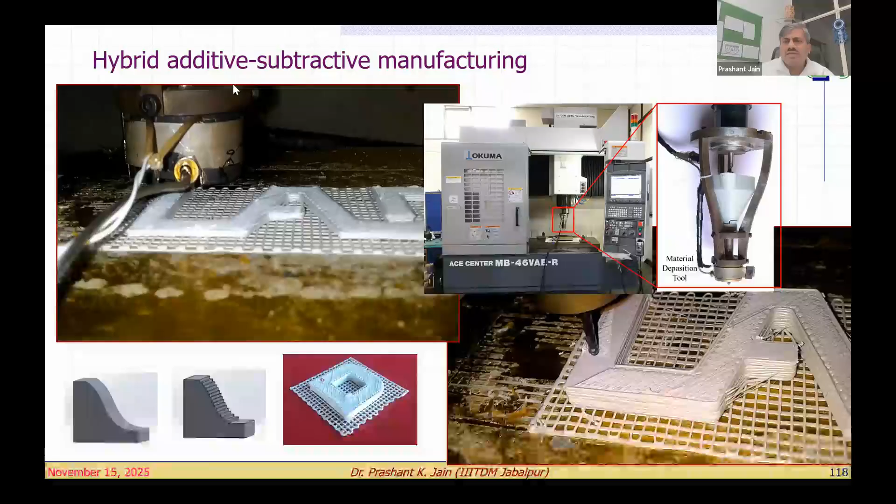Now look at this. We have further developed the MATLAB code, so that we can generate for additive manufacturing and subtractive manufacturing. We can give different parameters, import the STL, do the slicing, generate the toolpath, G and M code, and STL file, internal contour path. We can do all in one. And that G and M code file can be directly sent to your 3D printing machine.

Similarly, on the subtractive, cutter diameter, step over, etc., we can generate toolpath, G and M code. So this is the subtractive process. From the same we can generate both, for subtractive and additive. That allows us to make many experiments because everything is now developed by ourselves. Starting from the STL file, slicing, everything we can do on our own. So we are not at all dependent on any other system.

So if you have any question at this point, you may please ask. Then I will tell you about the induction conduction based metal additive manufacturing system, which we are currently working on. In the hybrid method, do we need to change the tool head? That is what you said, sir. Am I right? Tool head you have changed once the additive manufacturing is done, for subtractive manufacturing?

So the removal toolpath can be different from that of the deposition toolpath, is it, sir? Yes, you can use a different toolpath for both. The path strategy can be different. For deposition, you can use like this. For removal, your strategy might be like this. So depending on your choice or requirement, you can do it, or you can use the same also.

There may be many possible ways. There may be a gap also. Say, for example, this is a gap. So your toolpath will be like this. Then this area you have to restart, right? The same way, there is a gap, so you can come here, lift the tool, move like this. Then lift the tool, move like this. So you have to formulate the strategy, what way you want to do it, right?

Okay. Now look at this, what is happening with the two methods we have taken up. Somebody has typed in the chat box: what material is used for the nozzle, sir? Right now we are using brass.

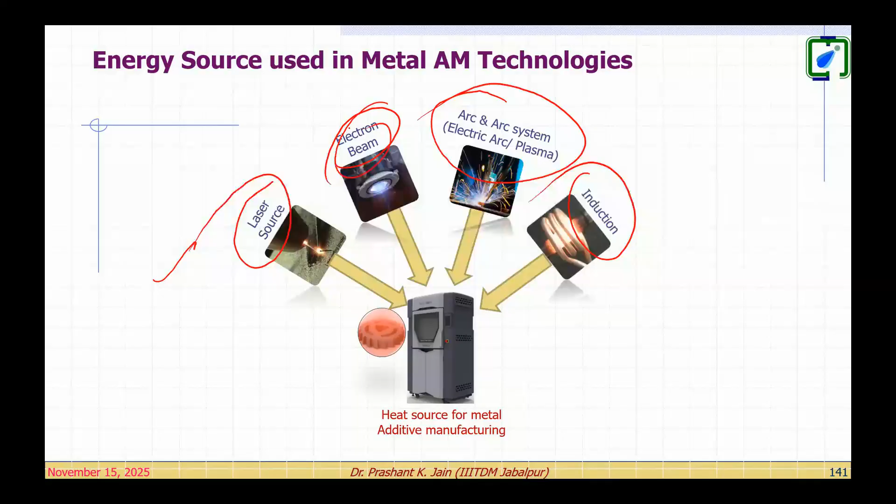Now look at what is happening with the energy source. You have the laser source, I have shown you the electron beam and the electric arc system, right? Now what I am proposing today is induction heating. Resistance heating will take time. Electron beam is very costly. So we are going to induction heating, and the induction heater is now available in every household. In the induction heating principle, this is the induction coil, this is the extruder, or nozzle. So extruder, induction coil, metal print.

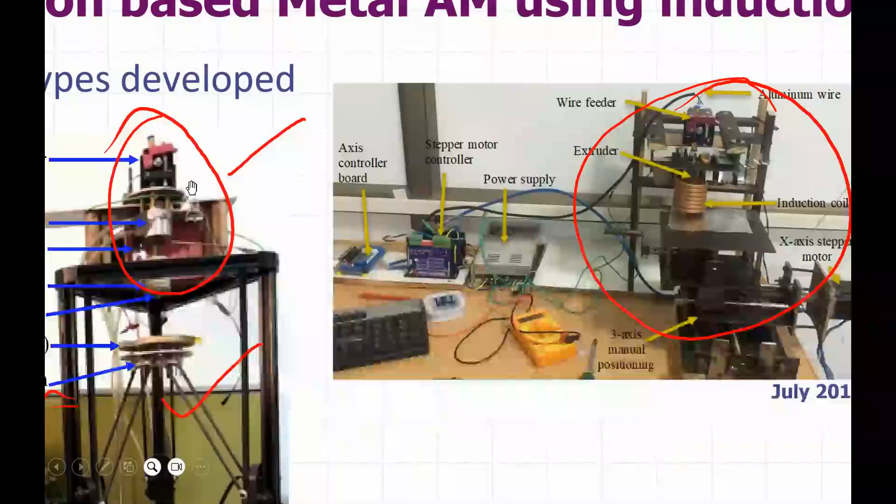Now look at this. Initially, long back, we started work. We started with this small prototype. Then we took this tripod additive manufacturing system and we put our setup over here. Right? And from this, the material is extruded. From this, and here the material is deposited. This is the one.

Look at this, the later one: next we built this rectangular base system. This is the aluminum wire feed, just like you see in any commercial 3D printer, which works on the ABS material. Okay, so this is the aluminum material. This we have designed typically to push this aluminum wire through. And here you can see the extruder nozzle. Below you can see the CNC machine setup, which we have designed.

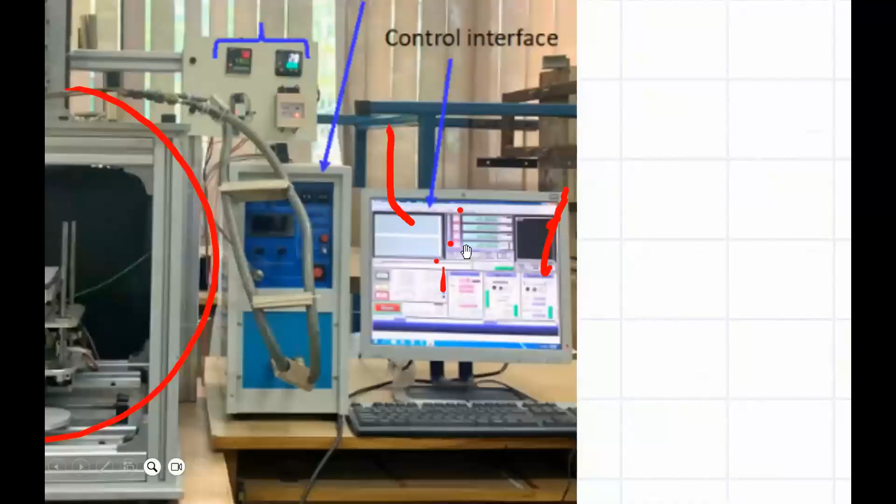Right, and this is our final system which we are working on. I will show you some of the videos over here. Initially this was in the open environment, and we found a lot of oxidation there. So to stop that oxidation, we moved it into a closed chamber. So this is inside; this is the vacuum chamber we have developed, and here is the motor. Every system is there inside this.

I'm using my mobile data, and if somebody is calling now, that might be. No problem, sir. It happens.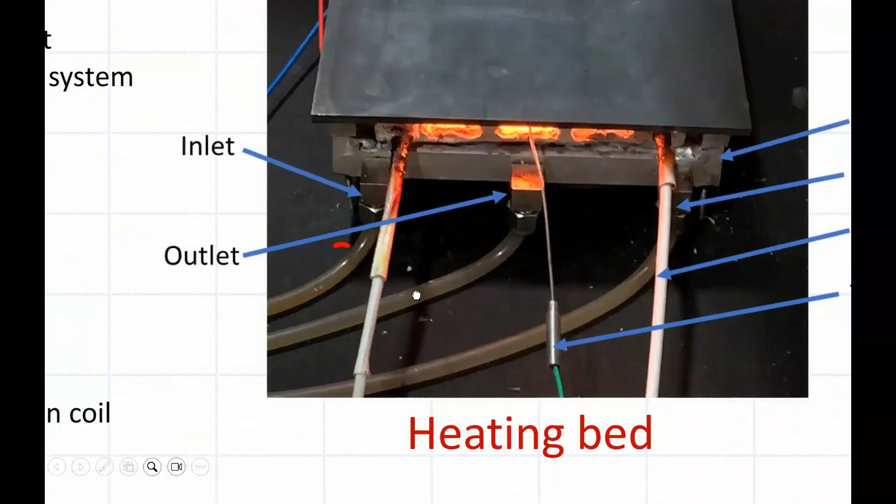The challenge is, once you start heating this system, below is the CNC system. So if you take this to 600 degrees centigrade, on the lower side the ball screw mechanism, the motor and the connecting wires will all burn. So that has to be cooled down very rapidly. Okay. So we initially put insulation, but insulation was not sufficient. So we have put a cooling channel here. You can see over here, there is a water tap. Inside this table there is a cooling channel, and water flows through this channel and out from these two channels so that the lower side machine system can be protected like this.

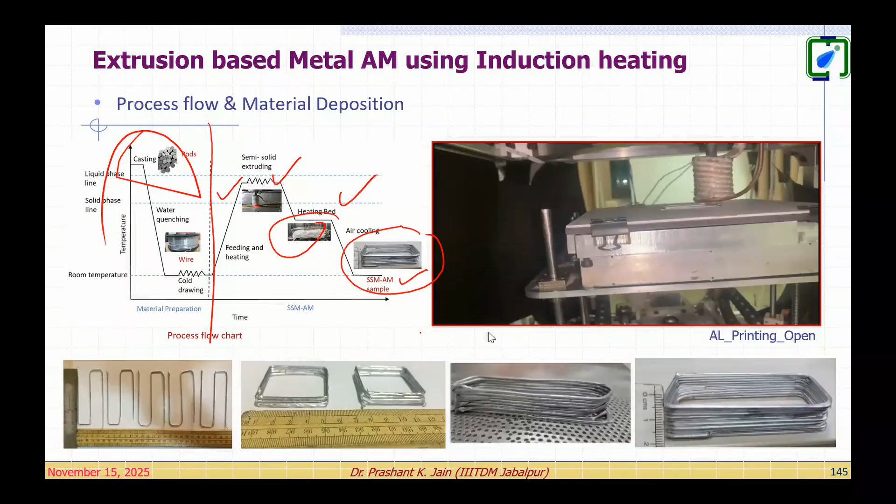The wire material, and here is the semi-solid extruder, then the heating bed, then this is the material deposition. So this is the wire up to quenching, then this is the heating, then the heating bed here, then the air cooling of the part. So we can have this part in this position. Now let me show you this; I have shown it, I think, at the very beginning. Okay, let me take you to another video.

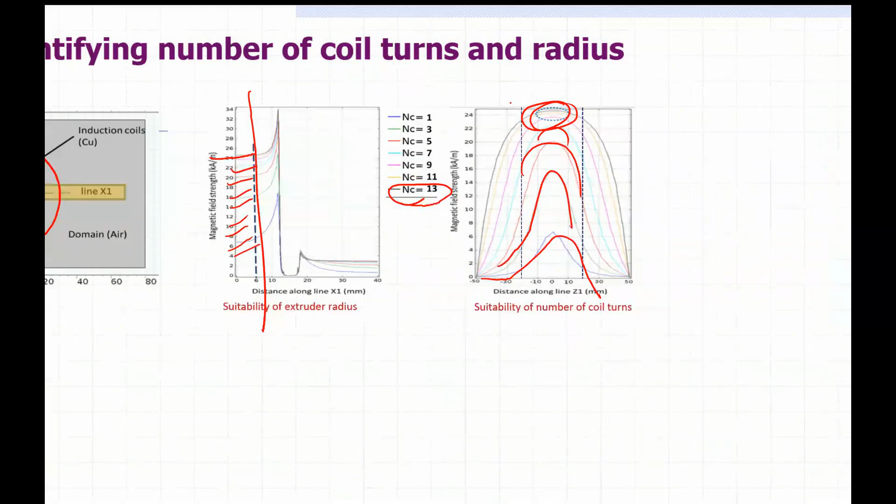So a lot of experimentation and simulation are required here. I'm not going into much detail on how long this will give you uniform heating or a uniform magnetic field, and how many coils. We have taken 9 coils. So you see here, we have done the simulation up to 13 coils. Starting from the first coil, second, third, fourth, and here you see there is not much difference in this graph. Okay, so we have opted for this 9 coil system, because you cannot put n number of coils in there. So 9 coils are there.

Okay, then we have developed this system. Okay, so we have put the PID controller, so this temperature can be restricted to 600 degrees centigrade.

So for developing this coil shape as well, we require the 3D printed support mechanism. Otherwise, by simple tools, you cannot bend these copper tubes into different radii without damage. So this 3D printed support we have developed, and this is the final coil. Let me show you. This is the final coil. Okay, and with this coil we have taken up the work.

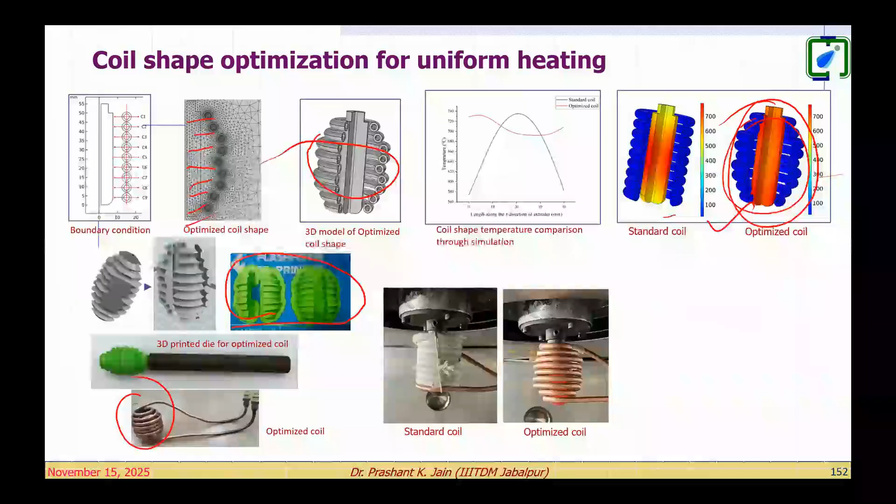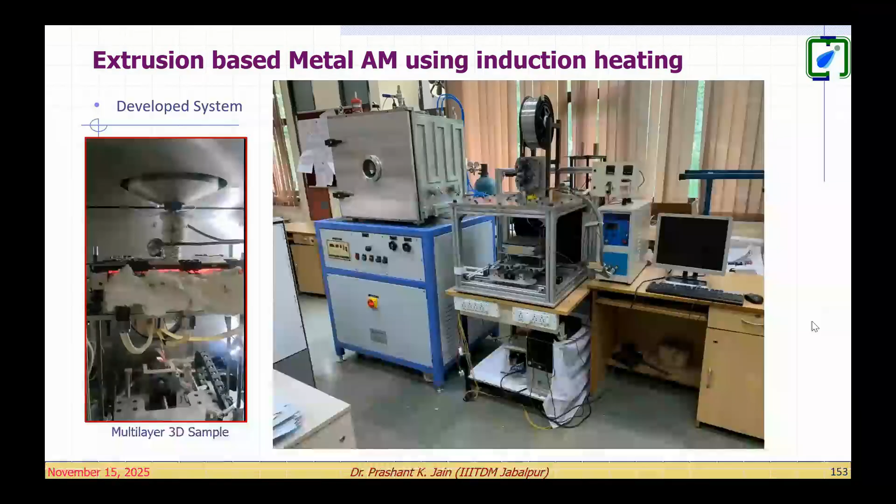So you see this material deposition taken up, and this is the final developed system which we have in our lab. If time permits, maybe Dr. Sachin can show you through the video call. You see here, this is the deposition going on. See the deposition going on. Is this okay? Very thick deposition, sir. Pardon? Very thick deposition. The layer thickness is very high. Yes. Right now, yes, absolutely fine.

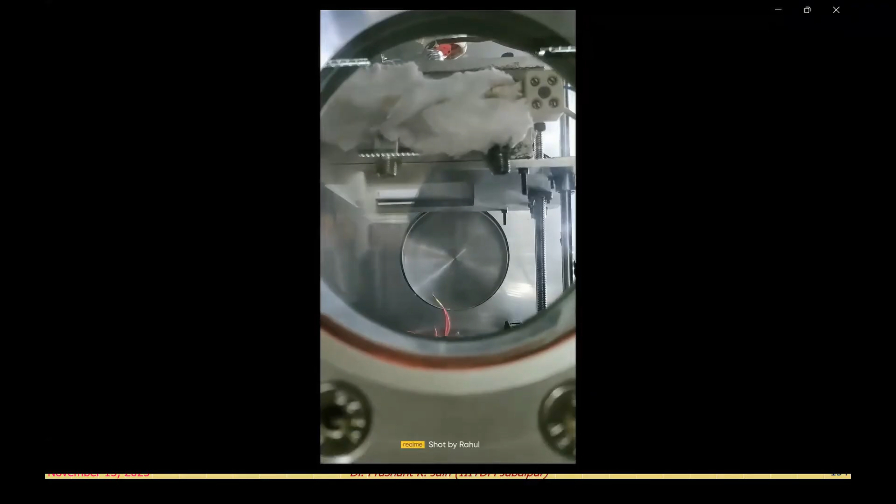It is the problem. You see, very thick deposition, and still we do not have any solution for the overhanging features, like we have in polymer. You can see on the top the deposition going on. Still a lot of breaks are there. Like polymer, I have shown you, we are still struggling to get it very much controlled. This is the one full machine video. You can see here the control system.

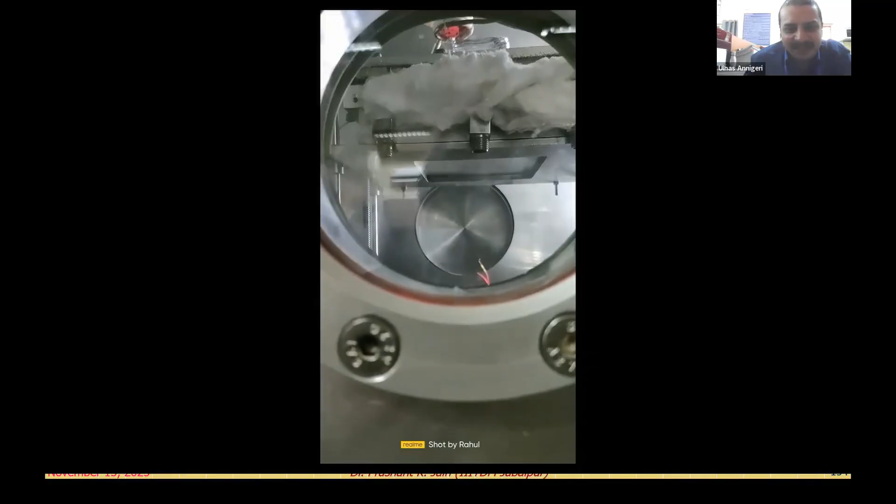I think you're still in a primitive stage, sir, because of material strength and all. Pardon? I think still you are in a primitive stage. Yeah, we have not at all moved to that part actually. Yes, sir. Because the first challenge is to ensure continuous printing and getting a proper print for additive manufacturing. Yes, sir.

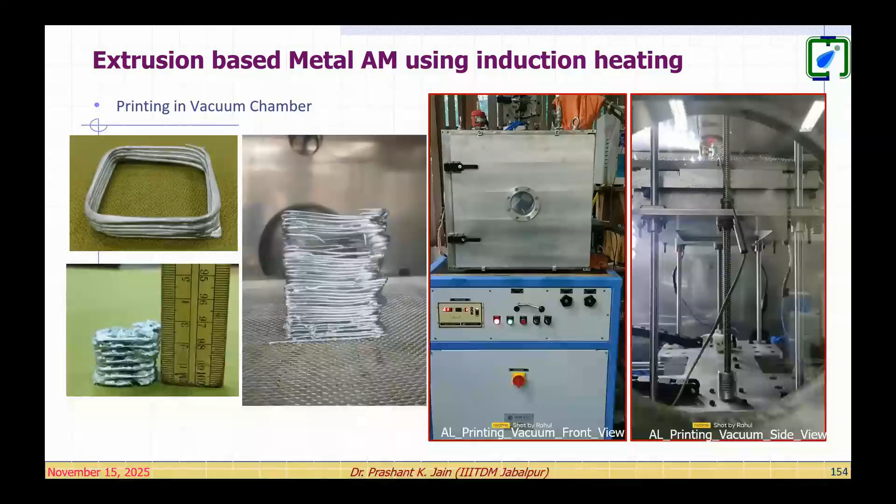See here, the deposition you can see. It is slow but steady and consistent. But you require all the information we have discussed in the last 2 hours. It looks like a standard coil here, sir. Yes, this experiment I am showing with the standard coil. Yes, this is the helical coil. Right, sir.

Let me show you in some video. So this is the full-fledged system, right? And this is the current scenario where we are looking for more support and more research to have a full-fledged metal deposition system in wire form. Right now, it's not available, right?

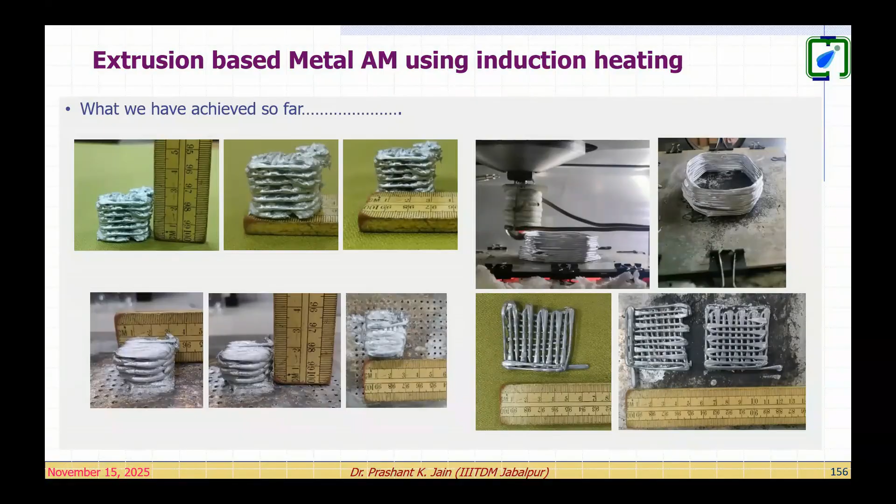It's really nice to see a lot of research work and the background related to additive manufacturing, SLS methods, and especially induction-based extrusion additive manufacturing. Because I have seen these machines very closely, a lot of research work has already been done by the professor in this direction, and still gaps are there where further research work is needed.